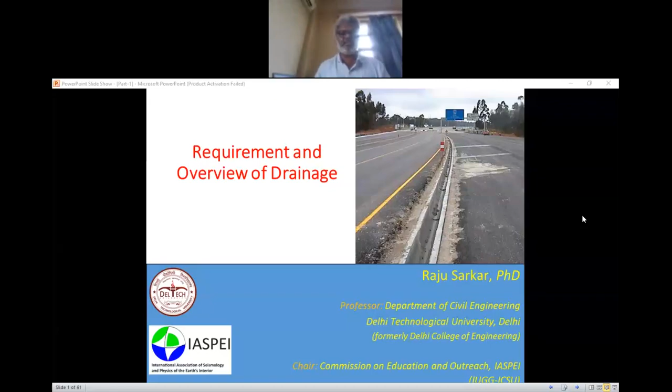We have engaged eminent, expert faculties from various organizations, and we hope it will enrich your expertise and experience, which will be very useful for all you engineers in getting practical problems solved. As Sunilji has rightly pointed out, please interact with the faculties.

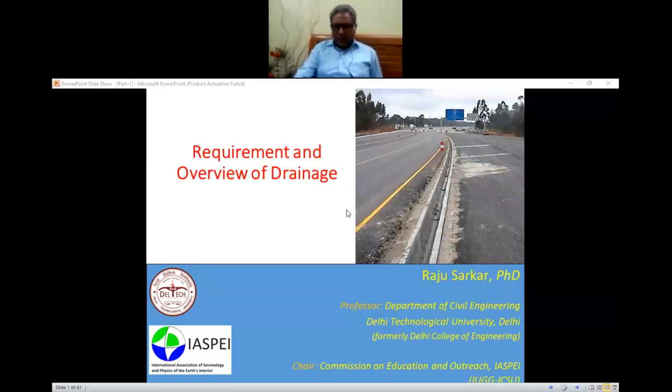First, confusion may come up regarding rigid pavement and flexible pavement. Whenever we consider any pavement, earlier it was only called flexible pavement. In a broader sense, to change this in a few places, we started with rigid pavement, though rigid pavement is very new compared to flexible pavement.

When considering flexible pavement, we generally consider three layers, mostly called subbase, base, and asphalt topping, shortly called the bituminous course. For rigid pavement, it is called subbase and concrete. Below the subbase, please remember we have another layer called subgrade, which is the existing soil mass.

Road drainage is the system designed for a road for proper collection, removal and disposal of surface as well as subsurface water.

Please remember, whether it is rigid or flexible pavement, whenever monsoon season comes, water starts to percolate through the pores available in the surface. If the bituminous course in flexible pavement, or the top surface in rigid pavement, is not sealed enough so that no void is there, then there is a possibility of water percolation. If it is not sealed, the water will start to percolate throughout the subsurface.

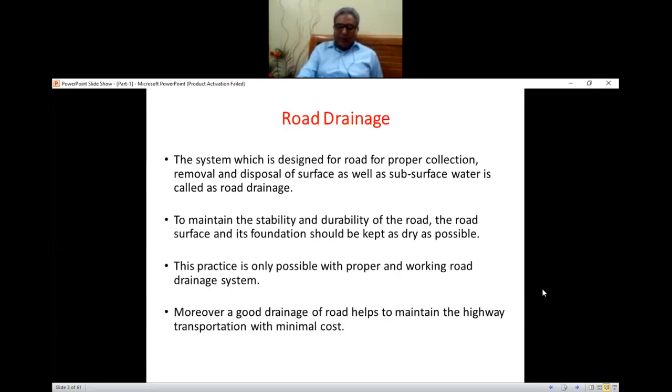In continuation of road drainage, the system redirects water into appropriately designed channels, because whatever water comes up from the subsurface or the top surface should go into the channel, and the channel will carry it to the required level, since wherever there are low-lying areas, water will start to assemble or gather there. Eventually it discharges into the natural water system, because wherever the natural water system is, whatever water comes from the top surface has to go to that system.

Considering water, since our participants are definitely engineers associated with various organizations dealing with road pavement, seeing the road surface water and groundwater, I feel we should make a division into two types of water. Here I have put two categories: one is surface water, and the causes of this surface water are either from rain or snow.

Please do remember, whenever there is a cold region like Ladakh in India, we are considering the Ladakh or Kargil area. During the summer, if there is some temperature change going on, whatever snow has fallen starts to melt, and this melted snow will try to percolate through the soil surface.

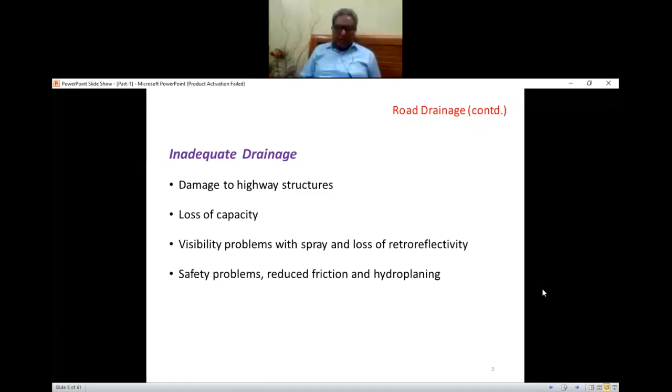Next is transverse slopes - removing water from the pavement surface, facilitated by cross-section elements, is called cross slope. Similarly, there is longitudinal slope.

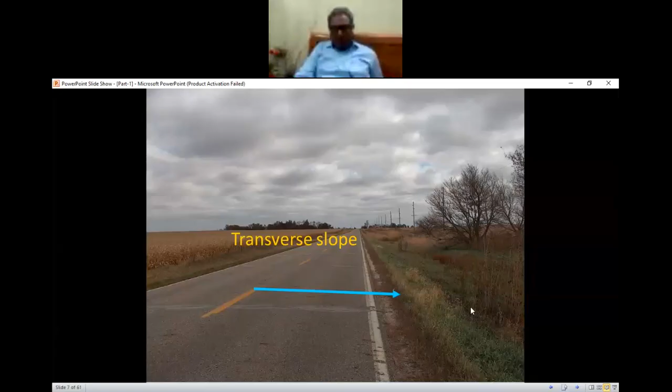Wherever water percolates or comes up in the form of rainfall during monsoon, this transverse slope will help it go to the nearby area, and if there are any ditches or channels - natural or man-made - it will flow there and immediately be collected. This is called transverse slope.

Another one is longitudinal channel, the third point we considered in my slide. In a single section of the road, I tried to show the transverse slope, longitudinal slope, and longitudinal channels - all three points that I have mentioned.

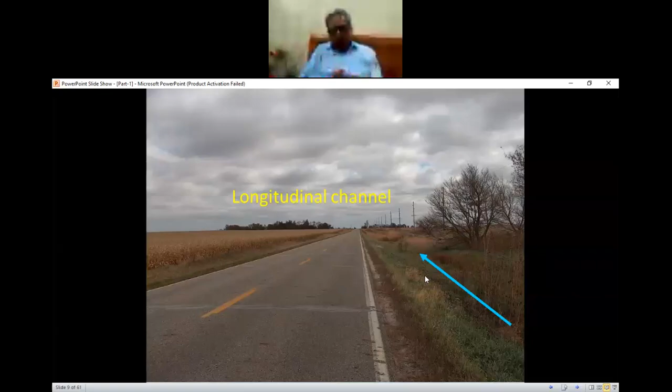This is under the same heading, adverse impact of stagnant water. Consequence of standing water differs from pavement to pavement depending upon the type of surfacing provided. Please remember, there are two points we are considering: one is flexible pavement, another one is rigid pavement.

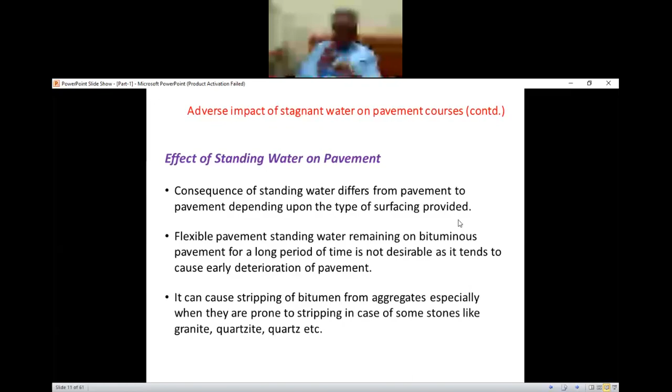So in this case, whatever we are considering right now, in flexible pavement, since there is only one binding course on the top surface, and the second surface is called bituminous course and dense bituminous course. If stagnant water is there, because water has the property - it is the rule of water - that it always goes towards the lower surface. So whenever stagnant water is there, it will try to find the voids, and through these it will try to percolate through and go to the downgrade.

I mean, I'm considering that it will try to go to the subgrade. So as a result, when it is percolating from the top surface to the subgrade, it will try to disturb water bound macadam, similarly the subsurface as well as subgrade. That's why this is the main problem that will arise in case of flexible pavement. And in flexible pavement, if any layer gets disturbed - whatever I considered, subgrade, subbase, or WBM - the whole structure of that layer of the road surface, flexible pavement, will start to settle down, and differential settlement will take place.

If I am considering rigid pavement also, concrete also starts to allow some water in if the concreting has not been done according to requirement - concreting not done properly because of unskilled manpower, or maybe for other reasons not properly compacted. If there is some void, water starts to percolate through these weak points. As a result, it will disturb the subgrade and subsurface as well. So when these two elements are disturbed, automatically differential settlement will take place, and you will be able to see horizontal cracks, vertical cracks, crocodile cracks, and other issues on the top surface of the pavement.

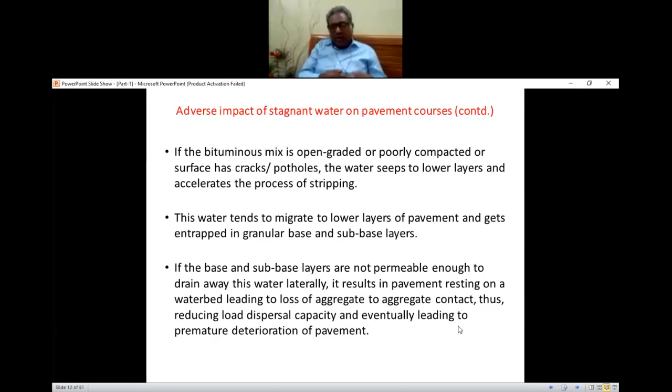When this water gets more and more pressure, it will try to go this side as well as that side. So it will start to disturb the other aggregates. As a result, the aggregate will lose its bond with bitumen and start to deteriorate. So although bituminous pavement exhibits good skid resistance, it does not help in rapid disposal of surface water. Please do remember.

Because in any flexible or bituminous pavement, you will find there are always undulations, because you can't compact the bitumen and aggregate mix in a uniform way. Whatever roller you use cannot compact it so that it looks completely sealed. So the surface will become like this: aggregate, then bitumen, aggregate. Whenever continuous percolation of water or rainfall is there, it will try to wash away the top surface.

This is due to surface tension and also due to the pitted surface without continuity, as in the case of the textured surface of cement concrete pavement. In the first point it is said it does not help in rapid disposal of surface water, because whatever water is there will try to stop up here. Just have a look at any road pavement after rainfall.

If you get down and start to walk on that pavement, you will find below your shoes, or below your feet if you are barefoot, that some moisture is there. Why is it coming up? Because whatever water came just after the monsoon or rainfall has not gone away totally. It will not become dry. So that is another point: this moisture starts to settle down in the lower portions of the top surface.

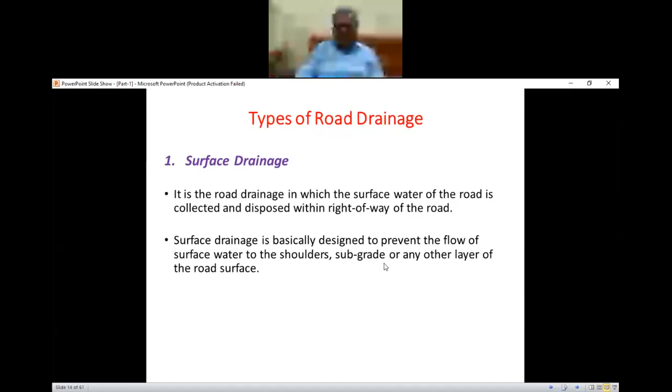Basic functions of surface drainage: to maintain the road surface completely dry from water. Similarly, to collect and drain the water from the road surface. Increase the stability of the road or highway, because whenever the surface is dry, automatically the life of the road will increase.

Similarly, by using the gravitational force, carrying the collected water into a nearby stream or river or nala, because water has the property that it always flows along the gravity. So whenever there is a high level and a lower level, water will pass from the higher towards the lower level.

Another main function of this surface drainage is to collect this water and disperse it to the nearby stream or river or nala. I'll show you the photographs also, because we are continuing with surface drainage. The first one is the side gutter. Why is it called the side gutter?

Side gutters are generally constructed parallel to the side of the road, and they dispose the surface water efficiently. The side gutter has to be constructed along with the road. Its main work is to collect the water coming from the surface of the road and disperse it to the low-lying area. The figure below shows the side gutter or side drain in cutting and embankment provided for proper surface drainage.

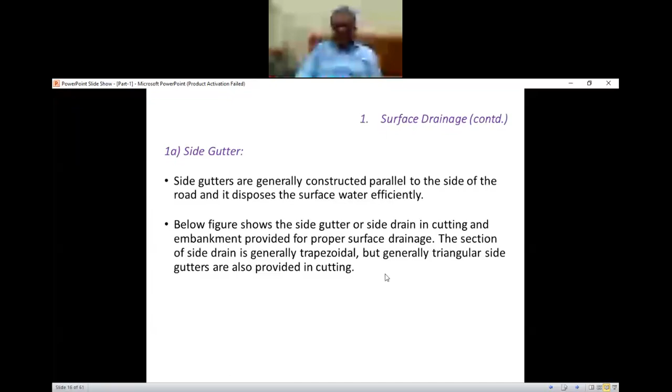The section of a side drain is generally trapezoidal, but triangular side gutters are also provided in cutting. This is your side gutter. Whatever water comes off the road pavement, because camber is provided to get the slope, is collected in the side gutter, and the side gutter has its own slope along the road, so the collected water will disperse to the nearby stream.

So the side gutter or side drain in cutting and embankment is provided for proper surface drainage. The section of a side drain is generally trapezoidal, but triangular side gutters are also provided in cutting, as I said. Have a look at this one: the top one is in trapezoidal section. But sometimes it can be a triangular section also, like this. It also works.

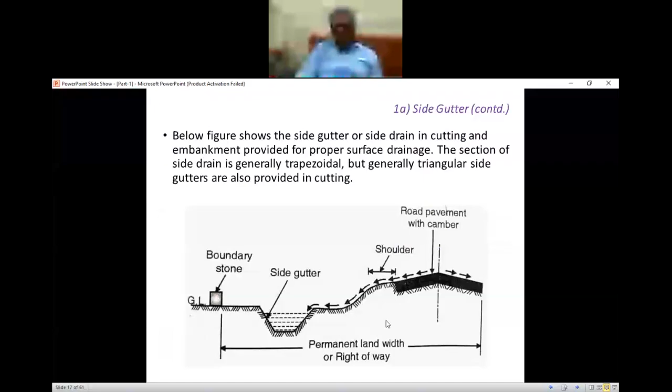So next is, they are basically provided parallel to the road surface only when the designed depth of the side drains is less and the road is subjected to light traffic. Because you see, in the previous slide, I tried to put it in the trapezoidal section. Let me go to this one. This is nothing but your triangular section of side gutter, because I tried to show how the triangular section will be. And the main purpose of the side gutter, as I said, is that whatever water has been collected from the surface will go to the side gutter and it will go to the

So you see, if I'm considering this section, sometimes the side shoulders or side area is hilly. I'm considering two side hills, and our road is in between, because cutting the hills we have constructed the highway. So sometimes the water, just follow my arrow, is coming from this side. If this side is very high, whatever water comes during monsoon will come at a higher speed. This higher speed would obstruct here, and it will come down directly here, and it may create problems to the surface of the road.

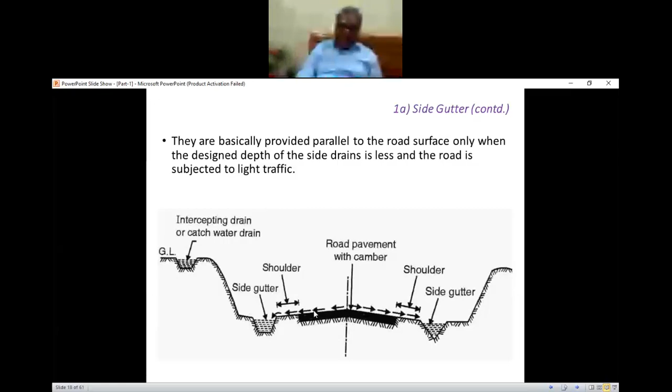During that time, if vehicle movement is going on, this water at a higher speed can create problems to the vehicular movement also. So in that case, you can put the intercepting drain or catch water drain. Whatever water is coming from the left side, it is similar on the right side also. You can put this one, and whatever water has been collected can go to some other channels, or maybe the channel where the side gutter is going to join. But please do remember that all water has not reached the side gutter. The purpose of the side gutter is collecting the road surface water only. So that is a typical section of a catch water drain.

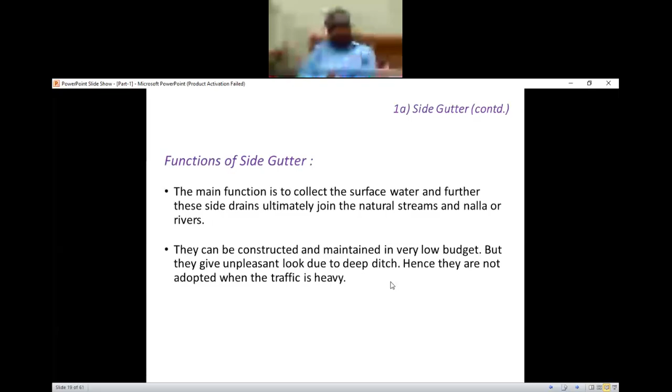So similarly, functions of side gutter, as we know, but once again I repeat. The main function is to collect the surface water, and these side drains ultimately join the natural streams, nallas or rivers. They can be constructed and maintained in a very low budget, but they give an unpleasant look due to deep ditches. Whenever you are moving on a road, if the side gutter is there, it doesn't look beautiful, because on the left side and right side are beautiful hilly areas, but suddenly you are finding the side gutters. Aesthetically it may not look good.

So that is why it says it may be an unpleasant look, and they are not adopted when the traffic is heavy. Sometimes the side gutters may not be useful, because once the traffic is heavy, there will be some thrust in the horizontal direction. It may affect the side drains. So whenever traffic is very heavy in a particular location, it is not advisable to use the side gutter. So catch water drain, whatever we are considering, first one was, please do remember, this is side

water is known as catch water. As I said, if I'm considering this side, the left side is at a higher elevation compared to the road. And our main intention is to keep the road safe, or in dry condition enough, so that the longevity of the road increases, as well as the vehicle movement will not be disturbed.

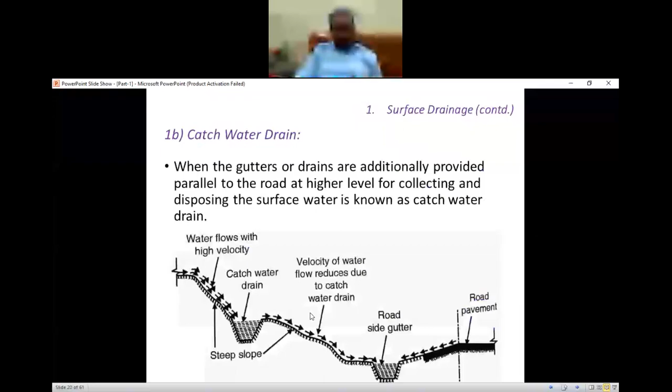So, functions of catch water drain. The catch water drain intercepts the large quantity of surface water flow and also breaks the continuity of the flow. Going back to this figure, water is coming up, and if there is no catch water drain, what will happen? The water will start to fall up to here, it will start and end up here, so it will continue. To disturb that continuity, we have to put that catch water drain.

And it reduces the velocity of water and prevents erosion and landslides, thereby protecting the road pavement. Because whenever surface water from the higher land is coming at very high speed, and when it reaches another soil layer, it will try to erode. That is why prevention of erosion occurs due to this catch water drain. And because when erosion increases, a time will come when it starts the landslide. So it can be protected that way.

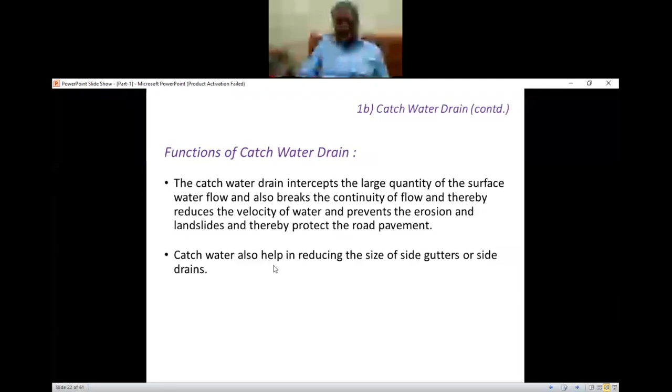So catch water also helps in reducing the size of the side gutter or side drain. The size of the side gutter is always there, but if we do not have any catch water drain, the side gutter area will increase, because all the water has to be dispersed through this side gutter in the absence of catch water drain. Another point is that the sectional area of catch water drains is generally 0.9 meter by 0.9 meter and should be constructed normally at 4.5 meter from the road surface.

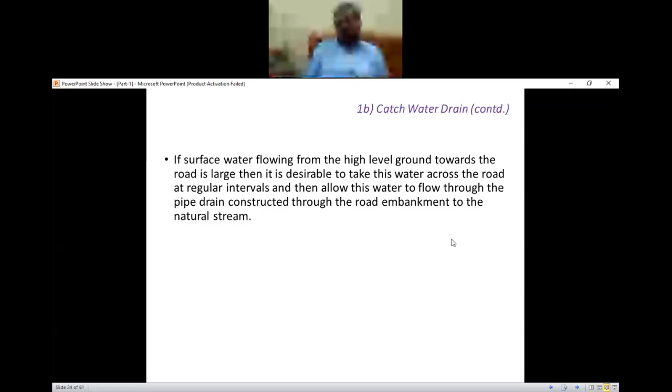A proper surface drainage system shapes and molds the land into a watershed that can convey the runoff into an organized drainage system comprising trench drains, catch basins, and storm sewers. If the surface drainage is below par, it will have a dangerous impact on the subsurface drainage.

And that is why, whatever we are considering, after this you can remember whatever we are talking about. So open drains can be of three types.

One is the shallow drain. These are only up to 30 centimeters deep and can be created with the help of a hand shovel, a simple one. They help remove water from shallow depressions and direct it to a larger drain or stream. These are not suited for draining a large area of land and are more of a temporary arrangement. In our houses also, if there is a water block, we take a hand shovel and dig some soil so that water can go out. This is nothing but what we consider a shallow drain.

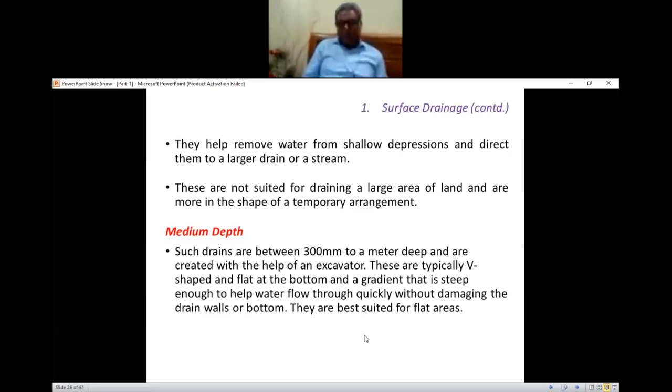Medium depth drains are between 30 centimeters to a meter deep, and are created in a V shape. Generally, the medium depth drain is V shaped, you can say triangular, flat at the bottom, with a gradient steep enough to help water flow through quickly without damaging the drain walls or bottom. They are best suited for flat areas. As I said earlier, we can have a trapezoidal or triangular section, but in this case medium depth is more suitable in the form of a triangular section.

Large open drains can be several meters deep and wide, and are created with the help of dragline excavators, bulldozers, or scrapers, and are capable of evacuating large volumes of water. I put this photo with some beautification trees, because these trees not only increase the beautification of the particular area, but also safeguard people so that they get some alarm that there is some obstruction, or a low-lying area where a water body is there. This is why I put this photograph for the large drain.

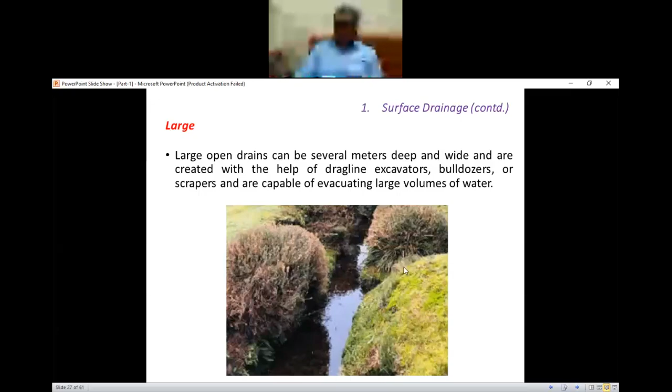So this is a system where a surface is shaped into parallel humps separated by hollows. This allows the hump shapes to shed excess moisture into the hollows, which double up as shallow surface drains. This type of surface drainage is ideal for areas where tile or mole drainage is not possible on account of inadequate depth or fall of soil, because whenever we consider any side drain, we need some natural slope also.

But whenever there is no natural slope, this type of system can be used, which is called humps and hollows.

Levees are another system, considered mostly in embankment areas. Levees are surface channels usually created on land with a gradient, such that the soil removed to create the channel forms a levee on the downslope side. You can consider this as two channels, or just one channel in cross section, with its own slope. This not only helps disperse water to nearby cultivated areas but also helps collect water coming from the surface. This is part of surface drainage. I collected these photographs to show what levees are, because it may not be common in India, but it is still part of surface drainage, which is why I included it.

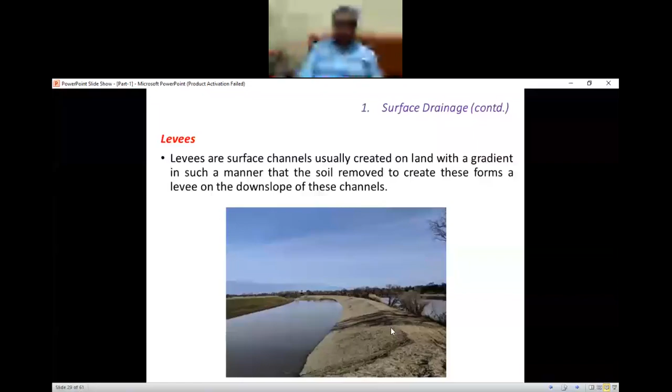The other type is grass waterways, where we generally consider flexible grass-lined channels. A grass waterway is typically quite shallow and narrow, maybe a few meters in width. This can be used to regulate water outflow going down slopes so as to cheaply prevent erosion. Our main intention here is that wherever alluvial or cohesionless sandy soils are available, water flow can start to erode the soil mass, since these soils lack cohesion between particles. So individual soil particles may wash away with the water due to the sloping ground, which mostly happens in hilly areas, as water flows from the top surface toward low-lying areas and starts to erode. So it is always better to use filter strips or trap sediments, which can be natural plants planted along the surface, to prevent soil from washing away with the water. This is the natural system of blocking eroded soil, called the grass waterway, and the bed of this waterway is also...

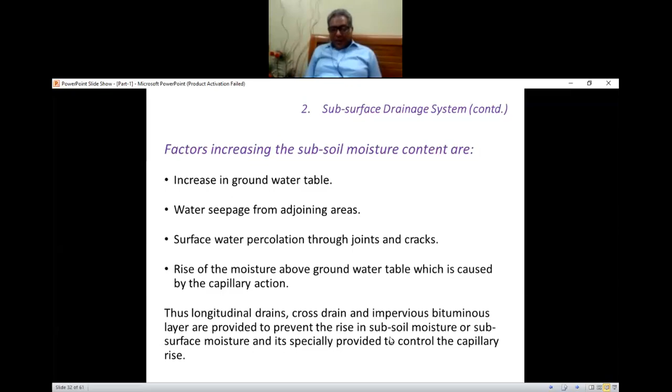The functions of the subsurface drainage system are to prevent and control the moisture content of the subgrade, to maintain the bearing capacity of the subgrade soil by restricting the entry of water into it, and to reduce capillary rise, because sometimes due to capillary action the water rises into the subgrade from the groundwater and settles down in a different way.

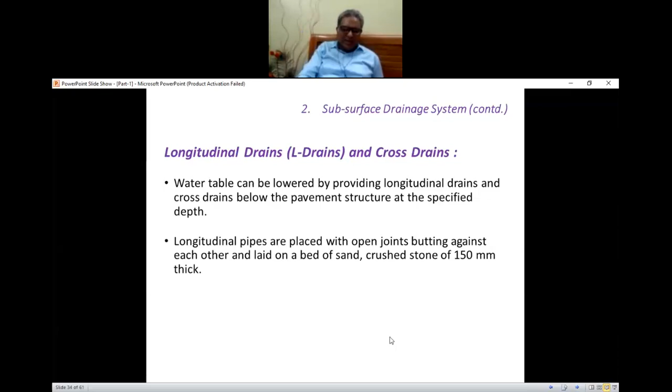Now we consider longitudinal drains under the subsurface drainage system, sometimes called cross drains. The water table can be lowered by providing longitudinal drains and cross drains below the pavement structure at a specific depth. Longitudinal pipes are placed with open joints butting against each other, laid on a bed of sand, crushed stone 150 mm thick. This is the size I have put up, and this is one type of cross drain you can consider. We are not considering the exact sizes here, since those are already available.

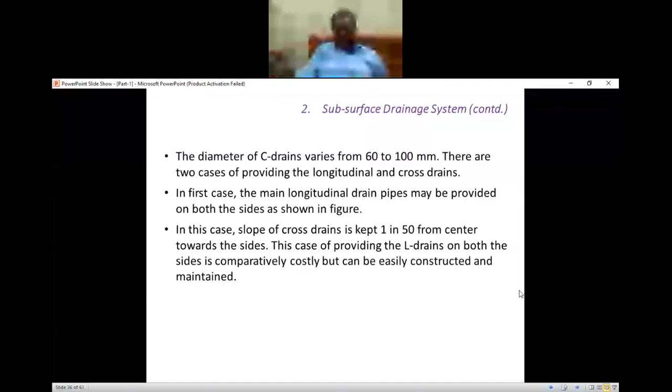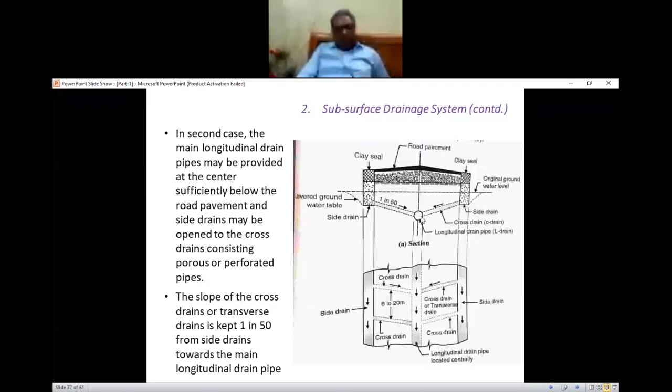The next one I'm considering is mole drains. The size is mentioned here, 40 to 60 centimeters - I'm putting it as millimeters, same way. The success and longevity of mole drains depends on soils having a high clay content so that once a mole channel is formed, it will maintain the channel for many years. Mole drains are not suited to soils with dispersive or slaking clay types, or permeable soils with high sand or loam content. This is the type of mole channel we're considering.

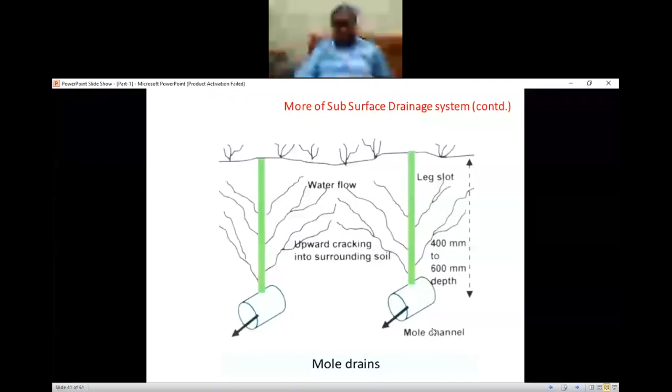A well-compacted concrete pavement is generally impervious to water and does not get affected by standing water, but joints, cracks, and shoulders permit moisture to seep through. Why do we consider the vibrator whenever there is concrete construction or pouring going on? Because the main purpose of the vibrator is to reduce the voids, so that all the ingredients of the concrete can come closer with each other, and it should not have any pervious concrete.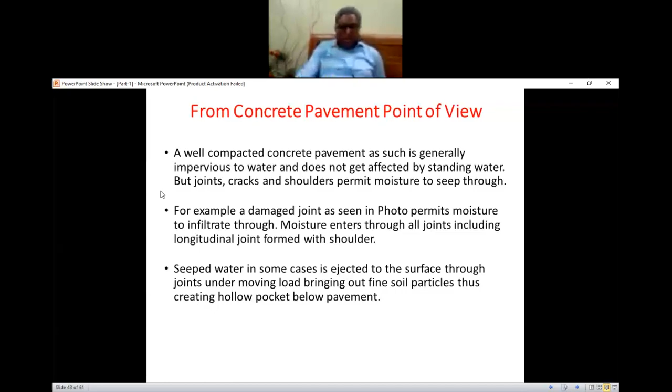So considering the concrete pavement, the possibility of water percolation is near the joints, because you can't construct a complete road of 1 kilometer without having joints - so joints will always come up. Joints are always the weaker point, so since there is a gap between the joints, they start to erode during vehicular movement. Similarly, due to uneven settlement in the lower subgrade, cracks are also possible at the top. In the shoulder area too, the shoulder may get cracked due to change in temperature or other reasons, and as a result, these voids or cracked areas will allow water to go below the top surface.

For example, a damaged joint as seen in the photograph permits moisture to infiltrate through. Moisture enters through all joints, including longitudinal joints formed with the shoulders. If I consider this one - you see, these are the joints. As I said, due to continued vehicular movement, there may be some settlement taking place here, and maybe in other directions or other places.

So as a result, this corner of the joint starts to crack down. And once the crack is there, whatever water is there, it will try to percolate through it. Similarly, this is another corner joint. Have a look at it, because this is the animation photo, and along with the actual photo, I try to put it out. A damaged joint groove can always permit seepage of water to the lower layers.

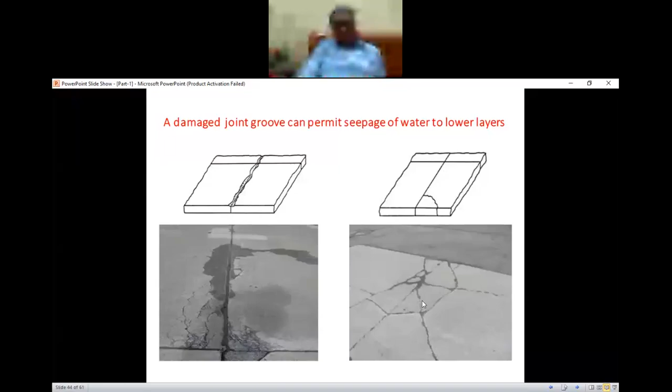So again, standing water on a granular or earthen surface is not desirable as it seeps to the lower layers. Earthen surface becomes slurry, making them unusable. Cross slope of the shoulder provided should be steeper so that water can flow expeditiously on such surfaces. Requirement of cross slope in an earthen shoulder therefore always has to be more than the paved surface.

Ladies and gentlemen, I'd like to share one thing: some of the slides I try to make in such a way that once you read them, you will be able to know what exactly I'm trying to tell you. Since it is in the online mode, sometimes it is very difficult to show you many things as in the physical mode. So that is why I made my presentation in such a way that if you read the sentences, it will be enough to understand what exactly we are talking about.

And here, first we have considered our surface as a bituminous surface. Next we have considered the concrete surface. Now we are considering the earthen surface. Earthen surfaces are mainly in village roads, maybe the nearby roads. If you are from a village, you have seen this type of road. So we are considering right now the granular or earthen surface. Requirement of cross slope is always there, because on an earthen road we must also maintain some sort of slope so that if the water comes, it can go to the sides.

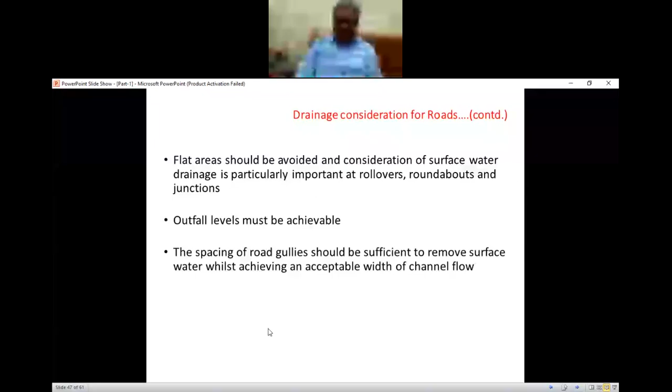So recommended design selection for urban road. If you consider the urban road, there may be no groundwater problem. If there is a groundwater table problem, then we have to go for a combined filter drain. And if there is no groundwater problem, then the sealed carrier pipe will be enough.

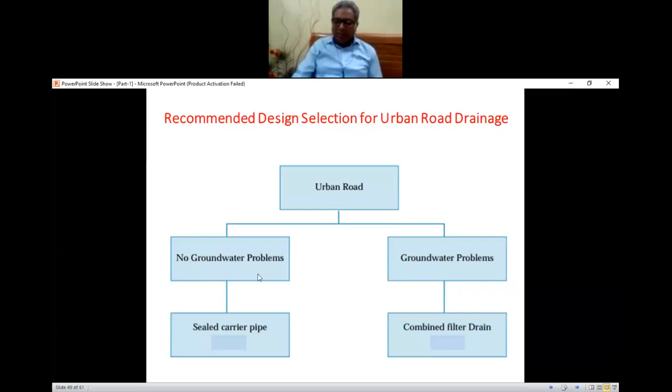So edge drainage is the best one if I am considering the road on embankment. Similarly, the sealed carrier pipe is also useful, where whatever layer is considered, we have to put in the sealed carrier pipe. So whatever water has been collected will cross over through this one. So the combined filter drain is this one. I tried to put it here.

So inflow is there. Our main intention is not to erode the surface, and we are considering an earthen road or maybe bituminous road or maybe concrete road, because we are now considering the subgrade area.

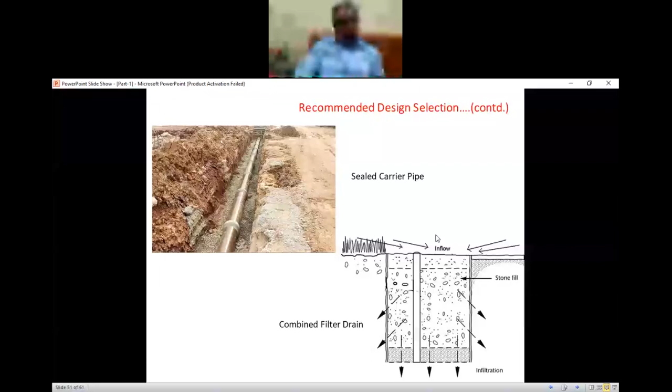So similarly, requirement of drains for road embankment, what are the requirements considered in case of drains? For roads on embankment, the side drains are provided on one or both sides. Side drains are constructed at a minimum distance of about 2 meters from the edge of embankment so that the water flowing in the drain does not enter the earthwork, because that is our main intention, the same thing we have been considering till now. And please remember, this is a metalled road, means either bituminous or concrete.

So these drains are also useful in arresting the rainwater falling on the adjacent land parallel to the road, and do not allow it to reach the embankment. The water flowing in the side drain can then be suitably disposed of without causing any harm to the roadway. As I said, some of the slides you may find we have already discussed, but still I have put this one because all slides are interconnected with each other.

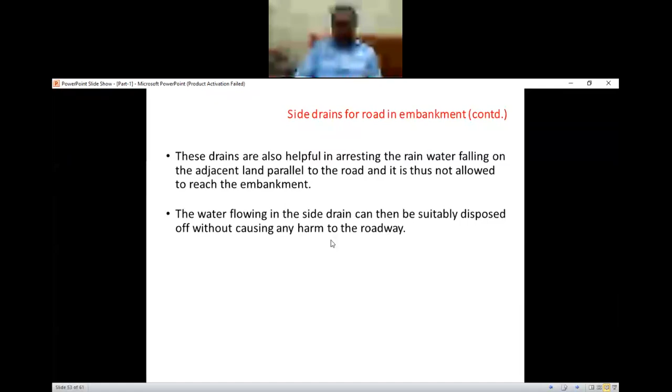So in case of the cutting area, just have a look, because this is the original slope of the ground. You have cut it out, and this is mostly in the hilly areas. For roads in cutting, the side drains are provided on either side of the formation. It may be here also, it may be here also. These drains are carefully designed, and it is to be seen that they do not overflow under any circumstances, making the roadway submerged in water. This is the main intention, because our carriageway or top surface should not be below the water level in any case.

So again, the open deep side drains may prove to be dangerous and unsightly, specifically in cases where there is a restriction of space. In such circumstances, covered drains or pipe drains or ditches filled properly with suitable materials like coarse sand and gravel may be provided, the pipe or whatever means through which the water will go out.

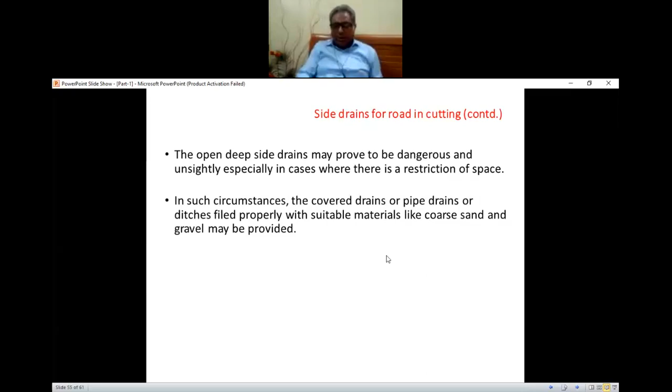So similarly, some sort of scour checks or cut-offs must be provided so that whatever water is coming, it can be obstructed in the lateral direction as well as the longitudinal direction. And mostly in the hilly areas, we get natural slopes, so we have to counteract that natural slope. We have to take advantage of the natural slope, as well as disturb the natural slope, to prevent loss of the highway in any case.

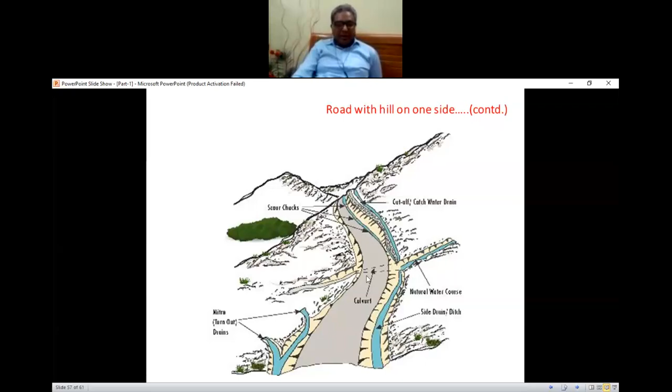So another one: runoff coming from the hillside must be intercepted by providing a ditch at the foot of the hill and disposed of on the valley side by providing drainage culverts at suitable intervals. If drainage is not adequate, the runoff water will flow above the road surface, resulting in damage. I showed this type of photograph earlier also; think about this road submerged in water.

I can discuss this because in the northeast part of India, mostly Assam, flood is quite common every year, and our friends representing various states or organizations also face this type of problem. If any road is submerged below the water, problems will arise, not only from the road construction point of view but also from the vehicular movement point of view, because if flood water is there, no vehicular movement will be there.

Why? Because with vehicular movement, the load will come. The road surface as well as whatever layers are available, whether subgrade or subbase, will have water, because they are in the submerged condition. So the vertical load coming due to the movement of vehicles will destroy it more, because the subgrade and subbase will be weaker.

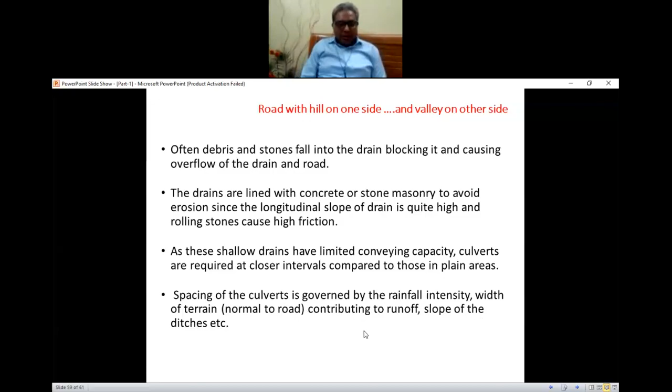Thank you very much. If you have any query, please feel free. Thayo Mog, you mentioned the UCR masonry, and I am really thankful to Sonam. He replied correctly that uncoursed random rubble masonry is also considered.

Is my slide moving? Are you able to see my second slide? Yes sir. Yes sir. Yes sir. Okay, thank you, thank you.

So, the objectives for design of roadside drains: to determine the catchment area and the expected flow, to collect design information for the drainage system, to determine the runoff onto the road and discharge of water, and to design the drainage channels using the results obtained. Once again, the main objective is to know the catchment area, the size from where water possibility arises, and the expected flow—how much flow will be there during monsoon or other seasons, including sporadic rainfall outside monsoon.

To collect design information for the drainage system means checking nearby areas for any other natural drainage system, or low-lying areas where water collection may occur. Then, to determine the runoff onto the road and discharge of water, and to design the drainage channels using the results we have obtained. Based on that, we can go for the design of the drainage channels.

Surface drainage system design trade-offs: steep slopes provide good hydraulic capacity and lower cost, but reduce safety and increase erosion and maintenance cost.

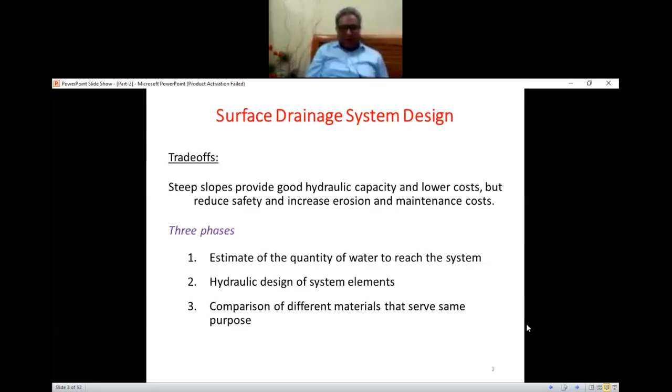Forms of precipitation - we must know what type of precipitation is possible. One is rain, which we get during monsoon: water drops that have a diameter of at least 0.5 mm. Light rain is up to 2.5 mm per hour, moderate rain is 2.5 to 7.5 mm per hour, and heavy rain is more than 7.5 mm per hour.

Similarly, snow is precipitation in the form of ice crystals which usually combine to form flakes with an average density of 0.1 gram per centimeter cube.

In cold regions, during monsoon, if water percolates through the surface of the road, it will try to pass through all the layers up to the subgrade. This percolation doesn't happen within 1 hour - it may take 3-4 months, or some soils can withhold or obstruct the water's passage.

Consider that cold season, winter, has come in places like Ladakh, Jammu and Kashmir. The water will settle down in the form of ice. Remember, the volume of ice is always more than the volume of water. So if water has been stuck between the top layer and the bottom layer of any road, this increase of volume due to formation of ice will create cracks between the top and bottom layers.

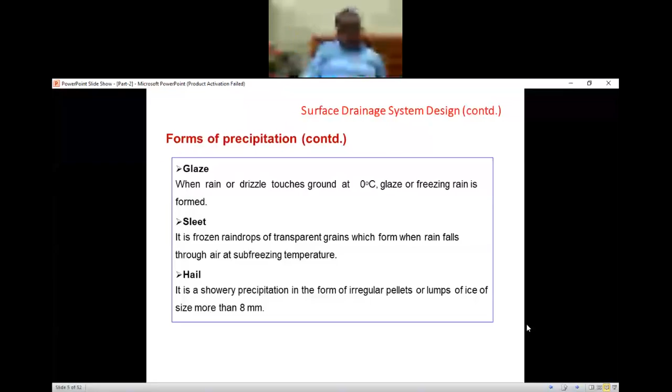Rainfall measurement - we must know about the measurement system. Non-recording system is called Symons' gauge. Another is the recording system, which may be a tipping bucket system, weighing bucket system, or natural siphon system. Out of all this, the tipping bucket system is quite common.

This is a typical Symons gauge - how much water has percolated through this funnel after a particular time is considered as precipitation per hour. Similarly, this is one type of rain gauge with some sort of containers or systems, and a measuring jar will help determine how much water has fallen or how much rainfall occurred within that 1 hour, 2 hours, or the whole day.

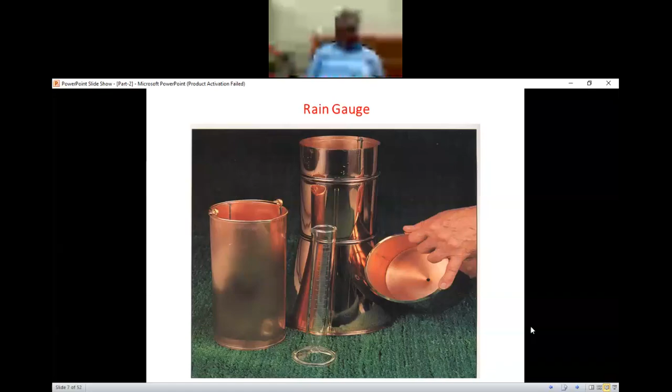Recording rain gauges are instruments that record the graphical variation of rainfall, the total collected quantity in a certain time interval, and the intensity of the rainfall. It allows continuous measurement of the rainfall.

When considering recording rain gauges, remember it is always measured in millimeters per hour.

Next is the tipping bucket system, one of two types. Whenever rainwater falls, it tips the bucket either right or left. The number of tippings taking place is recorded by a recorder, which tells you how much tipping has occurred. It collects water in a measuring glass or jar, and in common modern systems, it records electronically the amount of water collected within a certain time frame, maybe 1 hour.

If you have collected water for 3 hours and received a certain height in centimeters, convert that centimeter value to millimeters and divide by the number of hours. This gives you millimeters per hour, which is nothing but the average value.

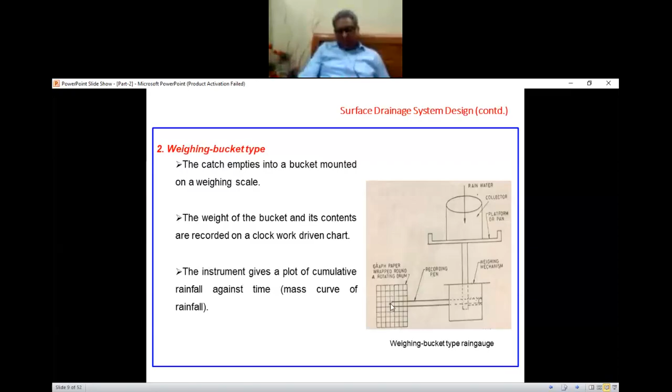Next is the weighing bucket system, where a recording pen increases its mark as water is collected. Some mark will be made on the graph paper, and from there you can find out how much water was present before the measurement started and what length the recording pen traced after a certain time. This is the weighing bucket system.

As mentioned, the instrument gives a plot of cumulative rainfall against time, called the mass curve of rainfall.

Next is the natural siphon system, a type of float system. The rainfall collected in the funnel-shaped collector flows into a float chamber, causing the float to rise. As the float rises, a pen attached to it through a lever system records the rainfall on a rotating drum driven by a clockwork mechanism. A siphon arrangement empties the float chamber when the float reaches a preset maximum level.

The system is very simple. But among all these, the tipping bucket system is most common because it directly records how many water drops have been collected through the funnel and passed up to the measuring glass. It does not require skilled maintenance or a skilled person. The only requirement is that if you are collecting readings every hour, you must collect the water just after that hour. If it goes beyond 1 hour, you may not get an accurate per-hour result, so that is something you need to consider.

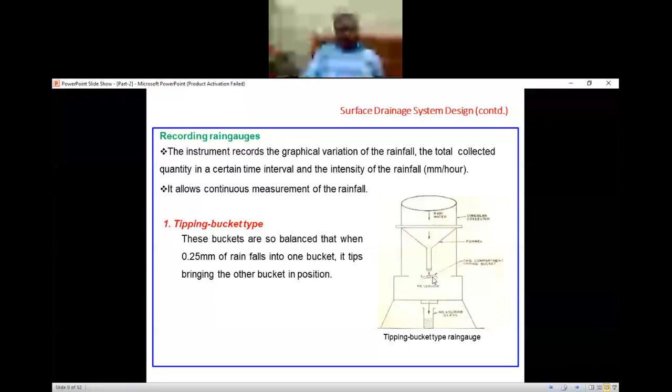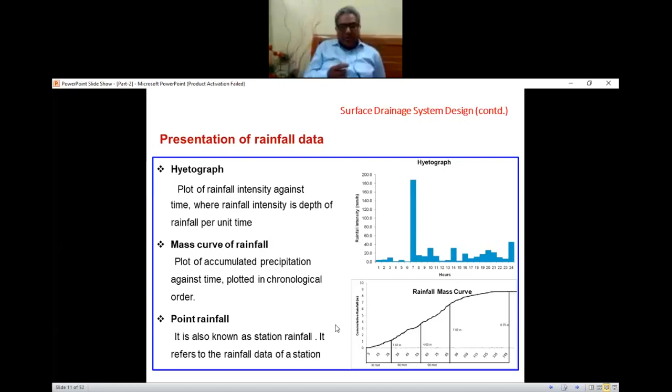So mean precipitation over an area - because these points are the rainfall of these rain gauges, and if you want to determine how much precipitation is there in that particular area, there are a few methods. One is arithmetic mean method, another is Thiessen polygon method, isohyetal method, then inverse distance weighting. The arithmetic mean method is very simple.

It is the average of the number of rainfall values, the water that you have collected, or the rainfall you have recorded. So it is summation of Pi divided by n, where i equals 1, number of rain gauge, towards the number of rain gauges - rainfall at the ith rain gauge station to the total number of rain gauge stations.

Thiessen polygon method - this method assumes that any point in the watershed receives the same amount of rainfall as that measured at the nearest rain gauge station. Here rainfall recorded at a gauge can be applied to any point at a distance halfway to the next station in any direction. So this is the Thiessen polygon system.

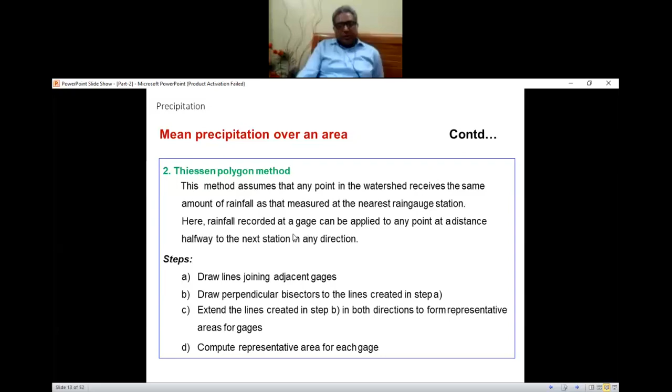I'll tell you about it in the diagram also. You draw lines joining adjacent gauges, then here we consider the area as well.

Similarly, this is called the isohyetal method, where some sort of line - you can say the contour maps - shows the 10 mm water precipitation. Similarly, 20 mm water precipitation, I mean the rainfall. Similarly, 30 mm water rainfall - all can be collected, or you can consider it as a map, which is a contour map joining the place.

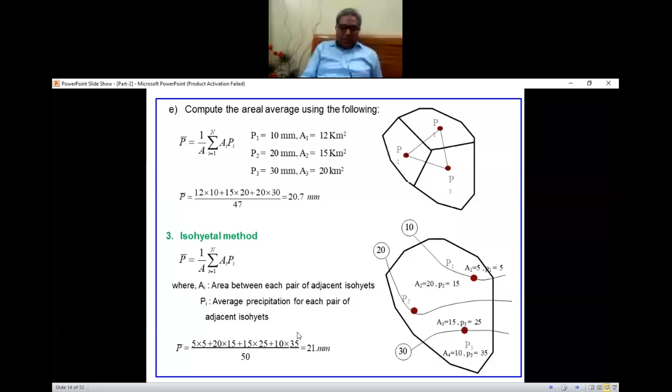This is a tutorial class, so I'm not considering any type of numerical as of now, but I'll try to give you an example of how to determine the amount of rainfall in a particular area. So this is one network system where you have to consider the polygon.

So here's another one, that is adjustment of precipitation data. Sometimes what happens is whatever value you have got may not be correct, because let's say I'm considering a particular location with 20 rain gauges, but suddenly, out of 20, only 18 were correct.

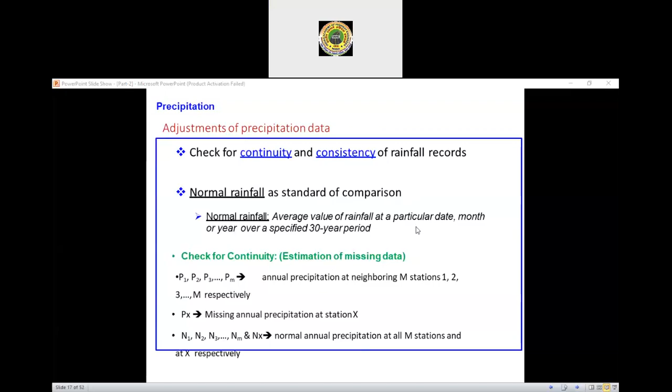So adjustment of precipitation data now, because as I said, there are 20 rain gauges, out of 20, 18 are working, 2 are not working. In that case, what will we do? This is what is called adjustment of the precipitation data, because we can't leave that particular area, we have to collect that rainfall value. So that's what we are considering.

The normal rainfall as a standard of comparison is nothing but the average value of rainfall at a particular date, month, or year over a specific 30-year period. I am considering this as a check for continuity estimation of missing data. Annual precipitation at neighboring M stations, 1 to 3 up to M. Missing annual precipitation I am considering as PX, and normal annual precipitation at all M stations. In this adjustment, we can go for the arithmetic average method, or the normal ratio method. The arithmetic average method is used when normal annual precipitation at various stations shows variation within 10% with respect to station X. Similarly, when variation is more than 10% with respect to station X, we use the normal ratio method.

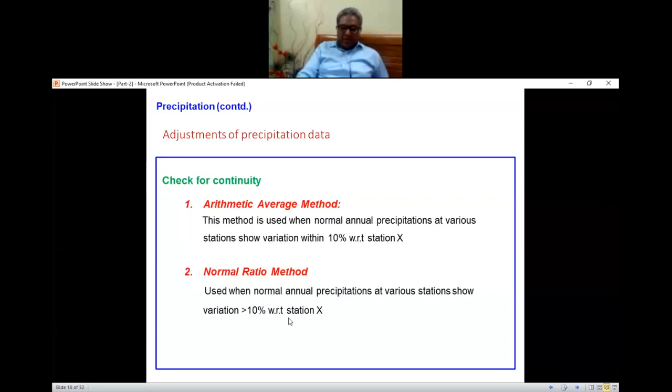So adjustment, continuation, test of consistency, causes of inconsistency - shifting of rain gauge to a new location is quite common. Sometimes, wherever you are standing or sitting and attending this training program, let's say a rain gauge is next to you. But due to some changes or displacement of your location, you have to shift this rain gauge. In that case, there's always a possibility of inconsistency in the records, because shifting itself may take time. Again, you have to think about where to shift and the prefix location. Please remember, in case of any rain gauge, the area it can cover is up to a radius of 3 kilometers only.

So it is within the 3 kilometers. If you do not have another rain gauge, it's okay. But beyond the 3 kilometer radius, you have to go for another rain gauge, which will cover the next 3 kilometers of radius. So let's say three new rain gauges come up. To make it more convenient, you may want to go for a 1 kilometer interval. In that case, wherever the measurement is going on in that particular area, it may not be accurate, or there may be instruction that you need to change your base from that particular location to this one. So there is shifting of rain gauge that may be there.

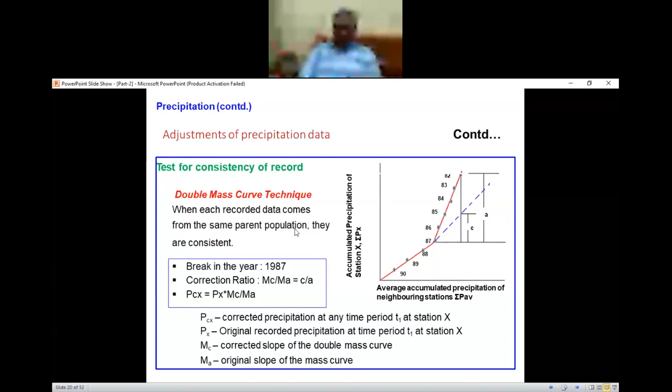So how to correct the old data? One system is called the double mass curve technique. So design of drainage system is generally in two phases: one is hydrological analysis and another one is hydraulic analysis, hydrological and hydraulic.

So in the hydrological analysis, the main objective of this analysis is to estimate the maximum quantity of water expected to reach the drainage system under consideration. So whatever the drainage system you are considering, we have to analyze how much water has reached that place. Some portion of the rainwater gets evaporated and infiltrated, and the rest is called runoff, which flows over the surface.

Let's say on a very hot day, suddenly you get some rainfall. Please do remember, since your surface is bituminous in nature, the top surface temperature of your flexible pavement is very high. So if you are driving during that period, you will find that some of the rainwater drops are evaporating immediately.

Maybe you have seen that on some summer or hot day, if some raindrops are coming, you will find some vapor on the top surface of your road. So this is nothing but evaporation taking place. Similarly, some water may go directly into the ground. Whatever water passes over the surface of the road, that is what is called surface runoff.

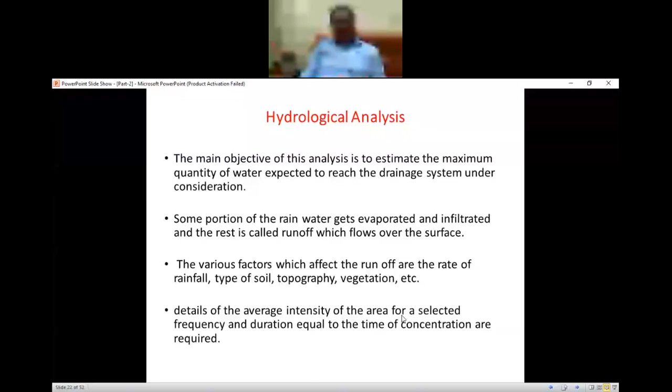Details of the average intensity of the area for a selected frequency and duration equal to the time of concentration are also required. You know how much average intensity of water the area is getting. All of this will help the analysis of the drainage system under hydrological analysis. From the data, the inlet time and the time for the flow of water from the farthest point to the drainage are calculated, which gives the time of concentration and the intensity of rainfall.

So where there are longer stretches with high ground, and the point where you are going for the drainage system is farther, I mean the distance is more, during the travelling time of the water from the highland towards your drainage system, some water may percolate from the surface into the nearby area. As a result, you may not get all the water from the farthest point at the point where you are collecting the data.

For the drainage study, a contour map and topographical map are always helpful. The estimated maximum quantity of water is calculated for use in the design of the drainage structure. The rational method is useful for small, usually urban watershed areas, less than 10 acres, or some practitioners say less than 200 acres.

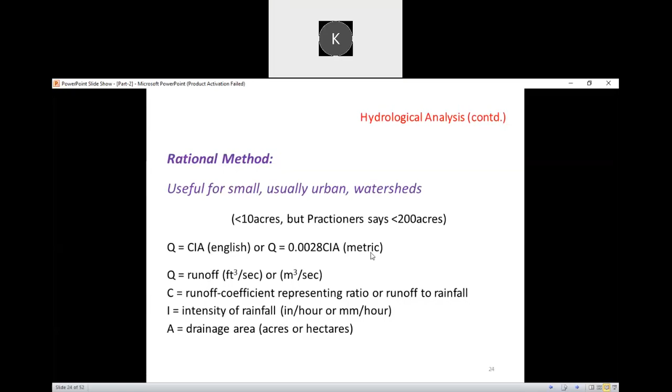A simple calculation: Q equals CIA, where C is the runoff coefficient, I is the intensity of rainfall, A is the drainage area, and Q is the runoff. If I'm considering the metric system, the formula changes because you have converted from the FPS system to the SI system, so the formula becomes Q = 0.0028 CIA.

So another point that we need to consider is the runoff coefficient. This is called capital C. There are some methods of runoff estimation. For example, the rational method addresses the effect of catchment characteristics through the single coefficient of runoff P. The coefficient of runoff P for the given area is not constant, but depends on the porosity of the soil,

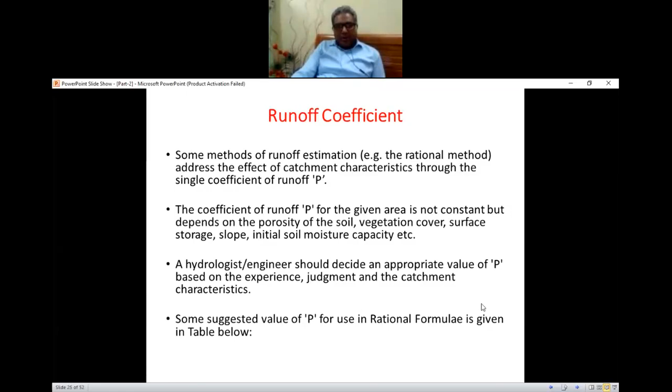Runoff coefficient ranges from 0 to 1 depending on land use and soil type. So when a watershed has many land uses and soil types, the weighted average runoff coefficient is C equal to C1A1 plus C2A2 plus ... CnAn divided by A. So ultimately you will get the average or more accurate value of C. The coefficient represents the fraction of rainfall that becomes runoff and depends on the type of surface.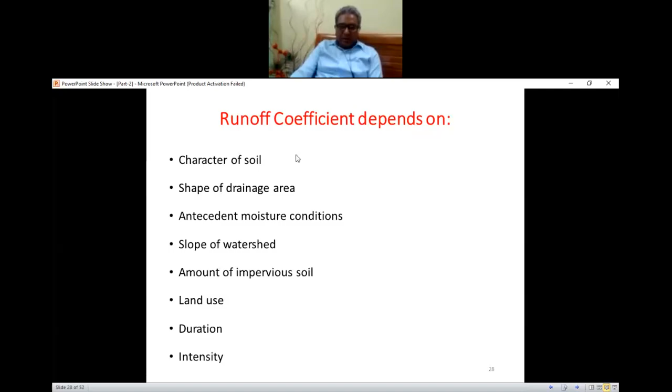The description of the area I put on the left side, and the runoff coefficient is this one. What the runoff coefficient depends on we have discussed, but once again I'm putting it point-wise. Characteristics of soil, shape of drainage area, antecedent moisture condition, meaning the previous moisture conditions, then the slope of the watershed, amount of impervious soil, land use, duration, intensity. These are the points the runoff coefficient depends on. I'll tell you one by one in the coming time.

Sorry. We are considering right now runoff coefficient C here. For slightly pervious soil the C value is less. So have a look at it. With concrete or bituminous pavement, where the impervious layer is there, the runoff coefficient is increasing. And if I'm considering a pervious soil with a slope, the value has increased. So what effect will it give? We know that Q equals CIA. So since the C value is more, the runoff Q will be more.

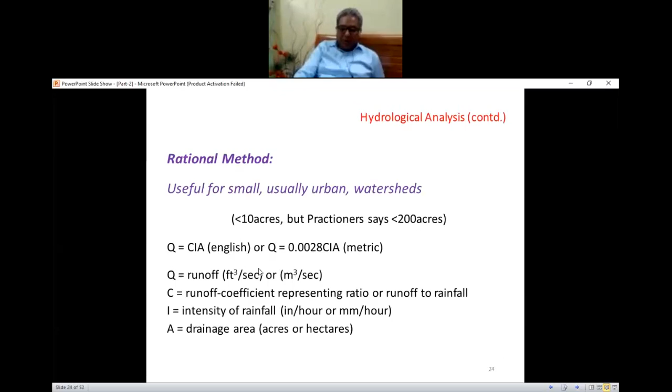Okay, have a look at it. So the runoff coefficient in the urban case, if it is a street, asphaltic or concrete, because this is urban, if I'm considering the cities.

So drives and walks, then roofs; based on that you can have a look at these runoff coefficients. Lawns: flat, average, steep, for sandy soil and heavy soil. Heavy soil in the sense that the soil is having more bearing capacity, or good soil you can say, well graded soil. So here you will get that the runoff coefficient C is on the higher side.

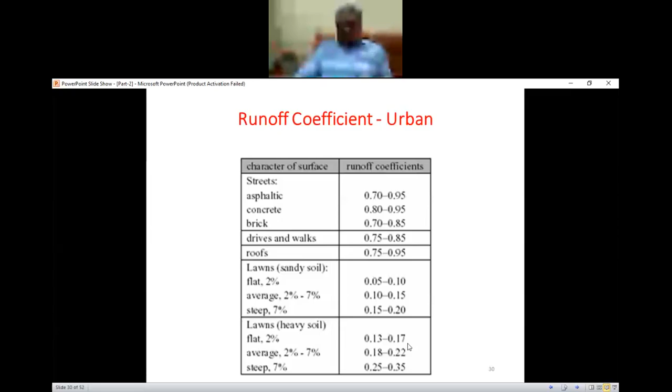So again, we are continuing with the intensity: average intensity for a selected frequency and duration over the drainage area for the entire duration of the storm. Based on the design event, say a 50-year storm, over design is costly, and under design may be inadequate. Average intensity for a selected frequency and duration of water over the drainage area. If I'm considering a 50-year storm, over design is always costly because we have to think about cost effectiveness also. Then under design may be inadequate.

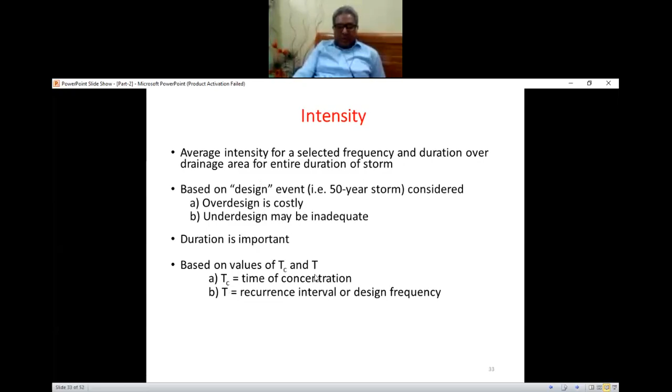Duration is important because the more the duration, the more rainfall there will be, so more and more water will come up. That's why duration is also important. And it is based on values of TC, the time of concentration, and recurrence interval or design frequency. This is another point that this intensity depends upon. Design event recurrence intervals: 2-year, 10-year, 50-year, and 100-year interval.

So time of concentration, TC, is another important point that we need to consider. It is the time for water to flow from the hydraulically most distant point in the watershed to the point of interest. The rational method assumes peak runoff rate occurs when rainfall intensity lasts more than the TC. Use the storm duration, because storm duration means the particular duration where you are getting the maximum rainfall.

The time of concentration also depends on the size and shape of the drainage area, the type of surface, the slope of the drainage area, rainfall intensity, and whether flow is entirely overland or whether some is channelized. Because if it is overland, the possibility of loss is always there. But if it is channelized, your channel will be a concrete one, maybe bituminous. So whatever water is collected at the inlet, the same will reach the outlet also. That's why it mentions whether flow is entirely overland or whether some is channelized.

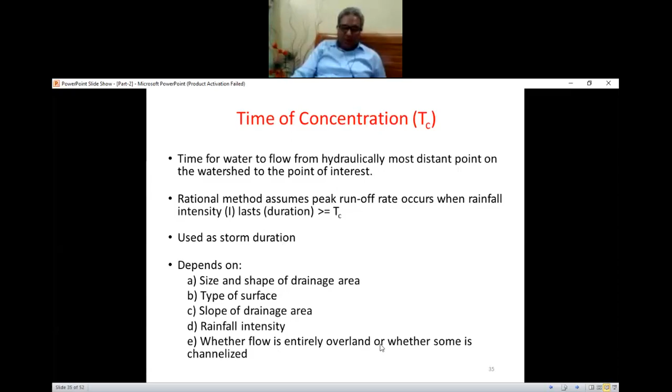If there is a particular location, say your office has a confined area under your control, where whatever rainfall or water comes out, all that data or record comes under you. So in that case, your catchment area is that particular boundary, up to where the municipality boundary or your jurisdiction extends. Similarly, your colleague's office may have jurisdiction of the next area. So this area itself you can consider as a catchment area.

So catchment area delineation is a very important step to estimate peak discharge, and it has a direct linkage with the flood peak, because in the particular catchment area, how much rainfall you have received and whether that rainfall is creating flood in that area or not, all will be considered.

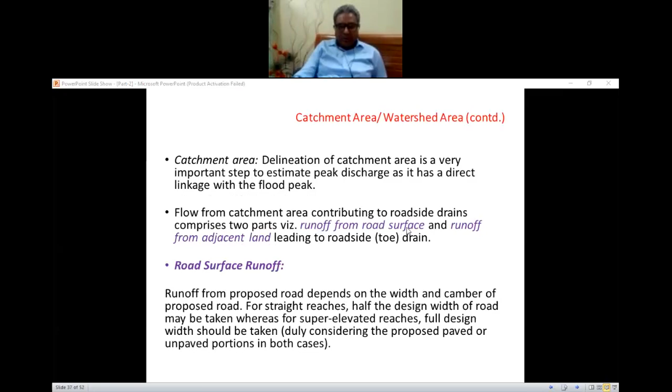So I'm considering road surface runoff, sorry, I'm stuck here because some sort of thing has popped up. An annotation request is coming up, so I'm approving it. Let me talk about it later. So now we are continuing.

I could not understand why it has been annotated. Can you stop this? Sorry, sir, please, I am getting disturbed. Don't try to do R&D, research and development, because it is creating a problem.

So it is necessary to gather information on natural and man-made ridge lines running along the proposed road alignment. These ridges should be considered as the boundary for defining the catchment area contributing flow from the adjacent land, because we are talking about the adjacent land surface only.

Guys, because of this annotation, I'm not able to process my presentation. There's some problem that has arisen, so I'm repeating the whole presentation. It's a kind request to the participants, please don't do that. I have to go out from my presentation now. Very unfortunate.

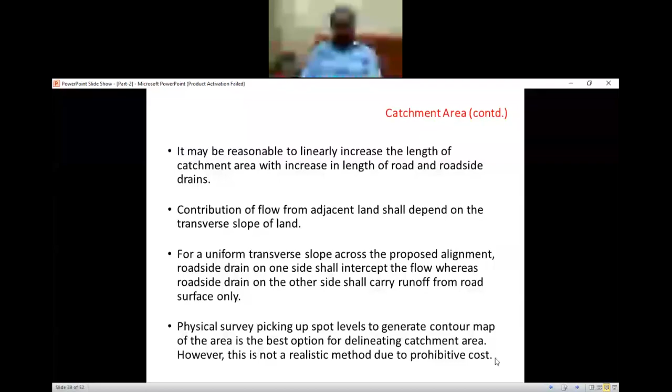So for watershed area calculation, the methods are topographic maps, aerial photos, digital elevation models, drainage maps, and field reviews. These are how to calculate the watershed area.

But our main purpose is to get the drainage system adjacent to the highway. So based on that, how much catchment area there is for this system, and whether you have to go for this system, depends on the authority or your jurisdiction.

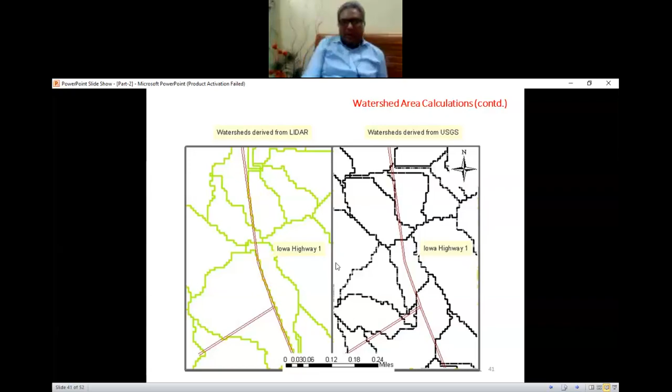Then Google Earth images, which are quite common, are very useful in delineating a small catchment area. The accuracy of manual delineation increases in rolling to hilly terrain. Special care is required for delineating very small catchments in flat terrains. Google Earth imageries are freely available and widely used these days. This is important, and everyone can collect this data.

Next is topo sheets. Topo sheets of different scales are available from the Survey of India, the organization we have in India. These topo sheets are also helpful to get the catchment area based on IRC SP 42, 2014. Here, the ridge line between two contours of very large intervals has been carefully marked, which will help you determine which catchment area you need to consider and from where all the surface runoff will come for your design purposes.

So for hydraulic analysis, a simple equation: Q equals A times V. I am sure all of you have come across this - the velocity of water multiplied by the cross-sectional area at the particular location, meaning the drains or culverts. The cross-sectional area of the drain and the culverts are now designed on the principles of flow of open channel. As I said, Q is the quantity of water in meter cube per second, V is the velocity of water, and A is the cross-sectional or required area of the drain.

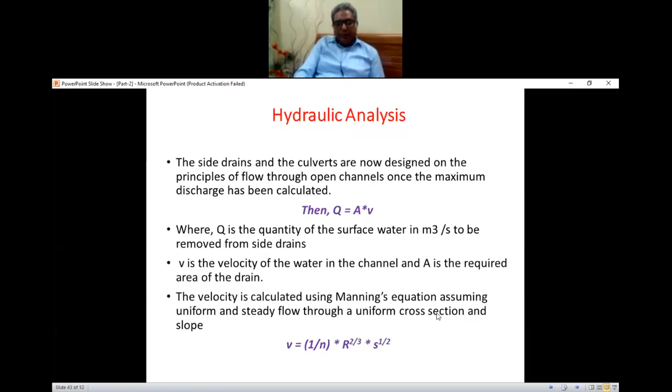The velocity is calculated using Manning's formula, where R equals A by P - the cross-sectional area divided by perimeter - and S is the slope, and N is Manning's number. Based on some parameters, we can assume this N value. So N is the Manning's coefficient, and R equals A by P. The minimum cross-sectional area is calculated from the permissible non-scouring velocity and the maximum discharge. I'm sure all of you have come across these equations while studying hydraulic engineering.

So, design of subsurface drain consists of the following steps. One is the depth of the drainage trench. The depth of the trench at which the subsurface flow has to be intercepted is determined on the basis of impervious stratum level, soil type, and the requirement at which the subsurface flow has to be maintained.

Then selection of the backfill filter material for the trench. The backfill's purpose is to improve the interception ability of the drain and to provide effective water collecting space adjacent to the pipe. Such materials should be coarse enough to allow water easy access to the pipe, but also fine enough to act as a filter material to prevent base soil from intruding into the pipe. Because if this soil starts to intrude into the pipe, it will clog up. As a result, no water will pass from high land to low land, resulting in some sort of temporary flood, and the main purpose of the drainage system will be defeated.

The size and number of perforations in the drain pipe depend on some key points: they should be able to intercept all the water entering the drain without causing a high head in the filter material. Similarly, the holes should be small enough to prevent the filter material from being washed into the pipe and plugging the holes. Generally, the maximum width of the slotted hole is considered as 0.83 multiplied by D85 of the filter, because that is the maximum size of the circular filter particle.

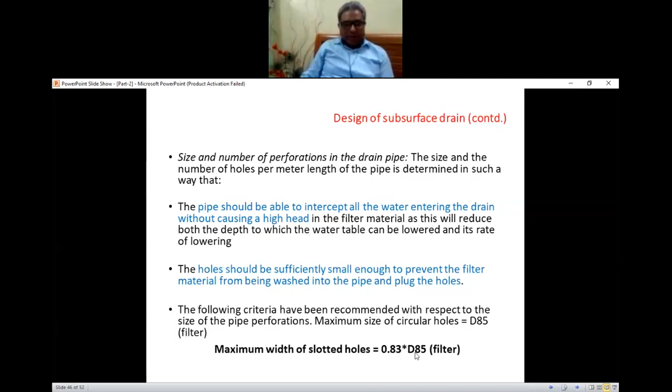The diameter of the drainage pipe must also be considered. For a given length, the diameter of the pipe should be selected such that the pipe will not run full near its outlet and flood the surrounding filter material. It must also be big enough so that all the intercepted water can be discharged through the pipe. Currently, no single authoritative recommendation is available.

As I said, there is no specification from the Ministry or IRC stating exactly how much pipe size is required, because it depends upon the particular surface water that has been collected and needs to be drained out, especially the water that accumulates during the monsoon season. But in practice, a 150 diameter pipe is commonly used.

The design of the initial abstraction must also be considered. A part of the precipitation gets captured by leaves of vegetative cover and trees, natural depressions, and similar features in a watershed. This part, called initial abstraction of the precipitation, does not contribute to generating the peak, as it either gets evaporated or infiltrated.

As I said earlier, whenever water collection occurs, that water is automatically not filtered water. Many foreign particles come with it, maybe some grass or other debris.

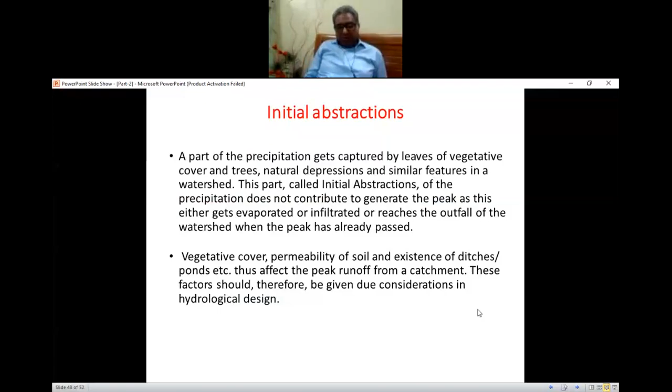Antecedent moisture condition is another point that needs to be considered. It describes the relative wetness or dryness of a catchment before the design storm hits the area, and it can have a very significant effect on the flow response.

The antecedent moisture condition was grouped into three levels according to the total amount of rainfall in the last 5 days before the design storm, as given below: dry, normal, and wet. Values are given for both the dormant season and the growing season.

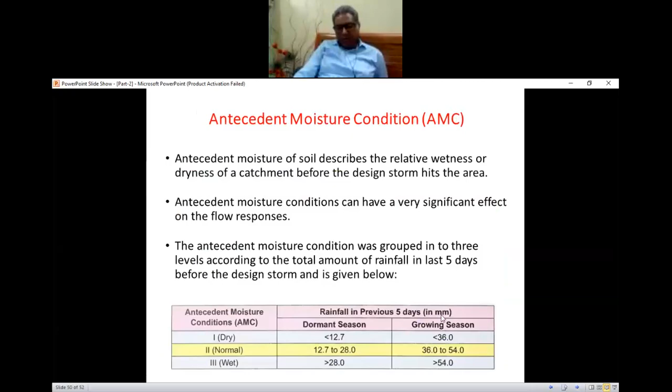I will share the PDF so you can see the data. The hydrologist should suitably consider the AMC in the design based on the recorded rainfall for the last 5 days; this is generally the standard we consider. In case records are not available, the rainfall distribution pattern of the area, the number of rainy days, and season duration of the rainfall should be studied in selecting the particular antecedent moisture condition for the hydrological design.